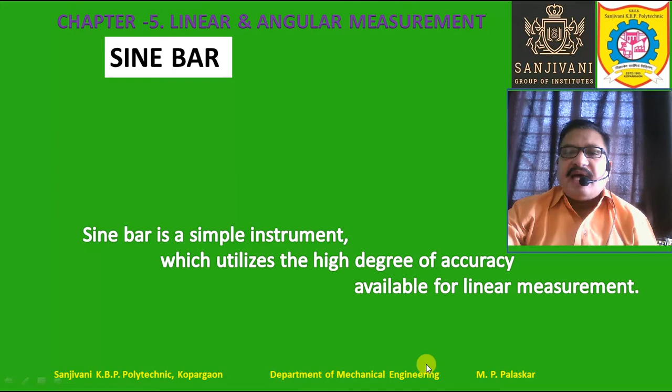The sine bar is a simple instrument which utilizes the high degree of accuracy available for linear measurement. It is used along with the slip gauges and the surface plate for accurate angle measurement, or it is also used for setting the accurate angles. For angle setting also, sine bar is used.

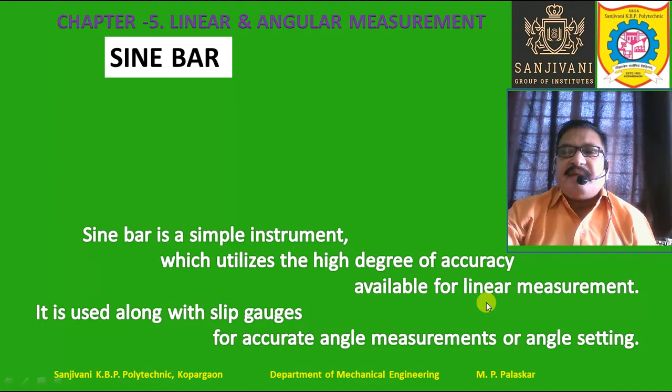The applications of sine bar include the measurement of taper plug gauge. So sine bar is used to measure the taper plug gauge.

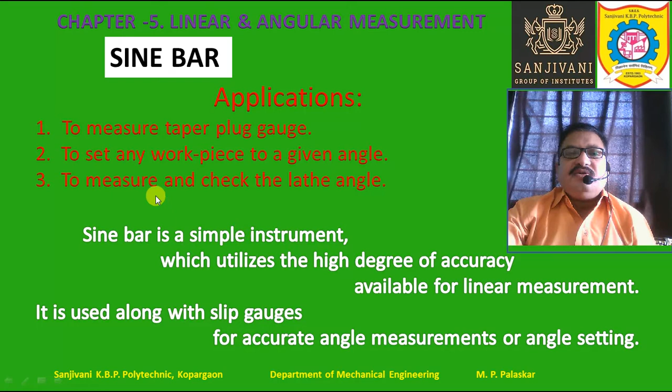Sine bar is also used to set any workpiece to a given angle. If a particular workpiece is required to be set to some given angle, then that is possible with the help of the sine bar. It is also used to measure and check the lathe angle.

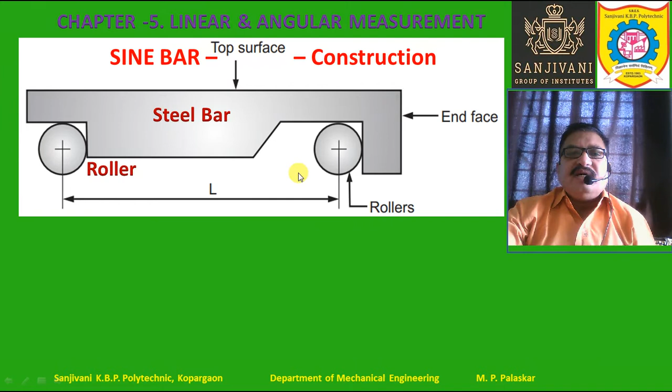Let us study the construction of the sine bar. The sine bar consists of a steel bar and two rollers. This is one roller, this is another roller.

These two rollers are attached to the bar at each end - this is the roller attached to the left end, this is the roller attached to the right end. At the same time, this roller is also touching this particular surface, the top portion of the sine bar or the steel bar is also in contact with the roller.

The distance between the two rollers, the nominal distance between the centers of the two rollers, is fixed and very accurate, and that may be 100 mm, 200 mm or 300 mm. So if you take a particular sine bar, either the distance between the rollers may be 100 mm, or it may be 200 mm, or 300 mm.

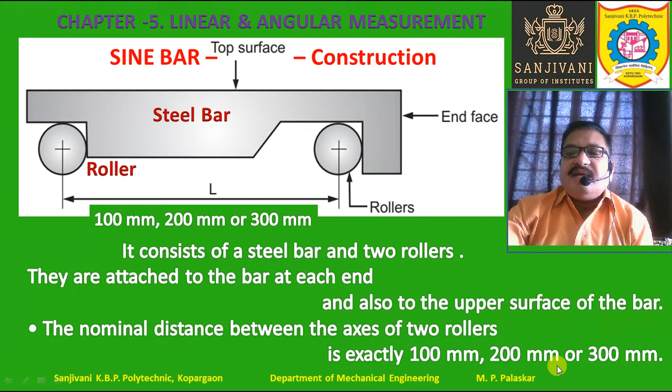The nominal distance between the axis of the rollers is exactly 100 mm, 200 mm or 300 mm, and the sine bars are specified according to this nominal distance between the two rollers as, say, 100 mm sine bar or 200 mm sine bar or 300 mm sine bar.

Now when the rollers are brought in contact with a surface plate, if these rollers of the sine bar are kept on the surface plate, the top surface of the bar is parallel to the surface plate. So this is the top surface, and it will be parallel to the surface plate.

So suppose this is a surface plate - this flat surface is nothing but a surface plate. And the rollers are kept on the surface plate, so automatically the lower end of the rollers will be in contact with the flat surface of the surface plate. In that case, the top surface of the sine bar will be perfectly parallel to this flat surface on which these rollers are kept.

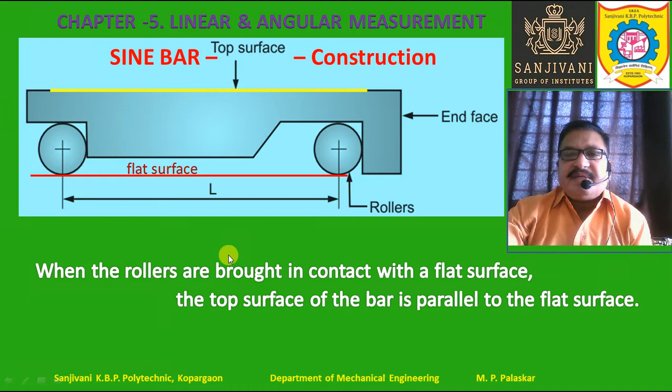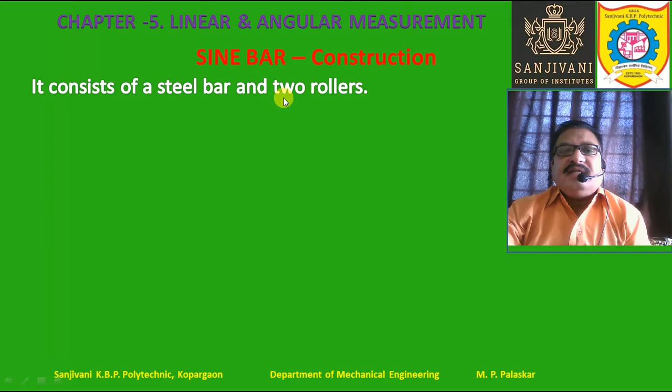Now the sine bar consists of a steel bar and two rollers. The bar is made up of high carbon, high chromium, corrosion resistant steel. The material of the sine bar is very important. The steel which is used as the material is high carbon steel and high chromium steel, and of course it is corrosion resistant because this surface of the sine bar faces relative motion, so wear and tear may be caused.

So in order to minimize the wear and tear, this bar is made up of such material which is corrosion resistant, and it is also suitably hardened, stabilized and precision ground. This material is very important - it is not only corrosion resistant, but it is suitably hardened, stabilized and precisely ground to the fine accuracy, flatness and perfect level.

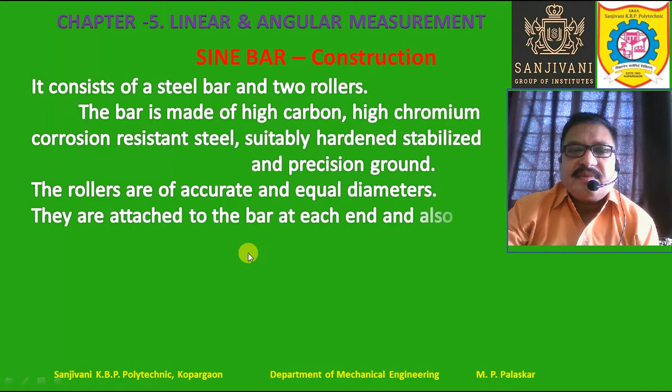The rollers are of accurate and equal diameters. The diameter of the roller is very important - it is very accurate, equal, and the location of the roller with respect to the sine bar is also very important and perfect. The distance between the centers of the rollers is also perfect and accurate, and the diameter must be equal. So these rollers are attached to the bar at each end and also to the upper surface of the bar.

The nominal distance between the axes of the two rollers is exactly 100 mm, 200 mm or 300 mm, and a sine bar is specified by this distance as 100 mm sine bar, 200 mm sine bar, or 300 mm sine bar.

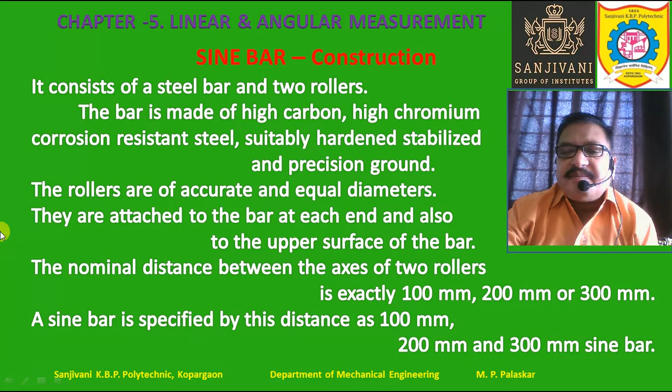When the rollers are brought in contact with the flat surface, the top surface of the bar is parallel to the flat surface. So the sine bar, when kept on the surface plate, since the top surface of the surface plate is flat, these rollers are in contact with the top surface of the surface plate. At that condition, the top surface of the bar is parallel to the flat surface of the surface plate on which the rollers or the sine bar are kept.

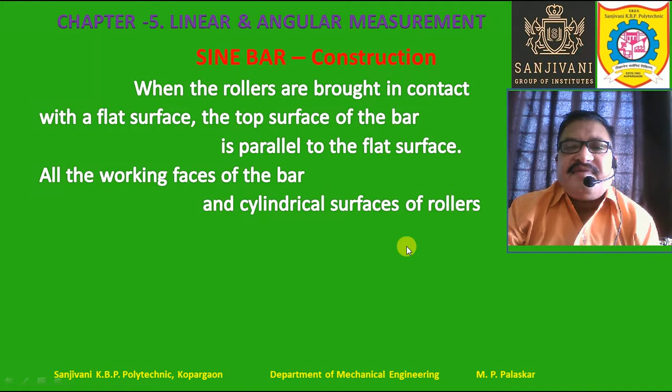All the working faces of the bar and cylindrical surfaces of the roller have a surface finish of 0.2 micrometer Ra value or better. So the roughness value is something like 0.2 micrometer, meaning the surface finish is very high.

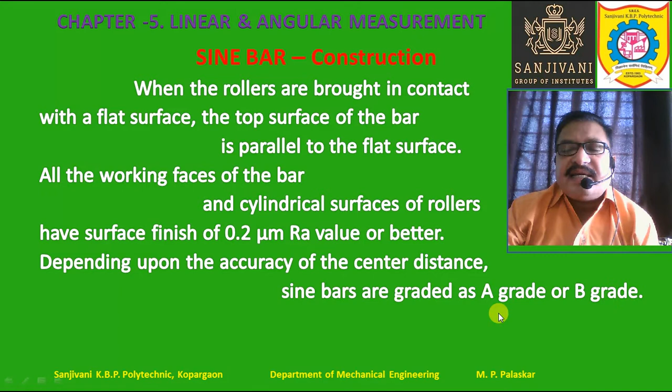Depending upon the accuracy of the center distance, sine bars are graded as A grade or B grade sine bar. Grade A sine bars are more accurate than the grade B sine bars.

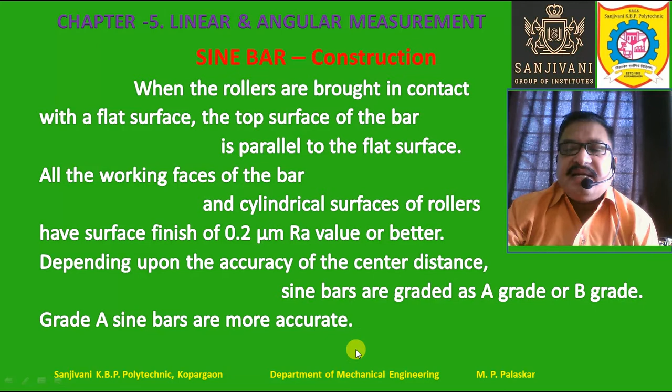Let us study the working principle of the sine bar. In order to set a given angle, one roller of the bar is placed on the surface plate. The surface of the surface plate is perfectly flat and accurately polished. So this one roller is placed on the surface plate.

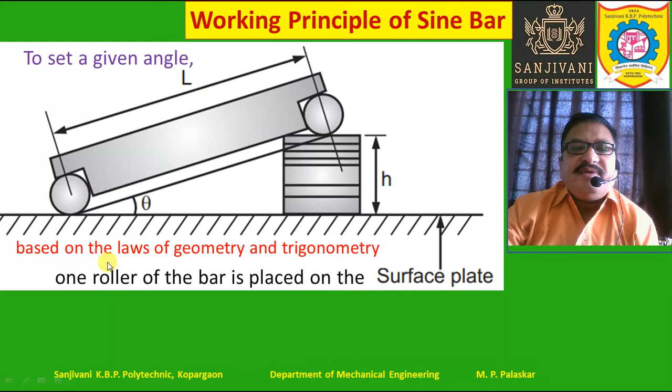The working principle of the sine bar is based on the laws of geometry and trigonometry. We are going to study how it is governed by these laws. So, in order to set the given angle, one roller of the bar is placed on the surface plate.

This roller is placed on the surface plate, and a combination of slip gauges is inserted under the second roller so as to obtain the required height h. This height h provides us the required angle theta, set by inserting the slip gauge combination below the second roller.

According to the law of geometry and trigonometry, we know that sine theta of a right angle triangle - consider this right angle triangle where the height is h and the hypotenuse length is l. Sine theta is equal to the opposite side of angle theta divided by the hypotenuse: h is the opposite side, and l is the length of the hypotenuse, so sine theta equals h by l, small h upon capital L.

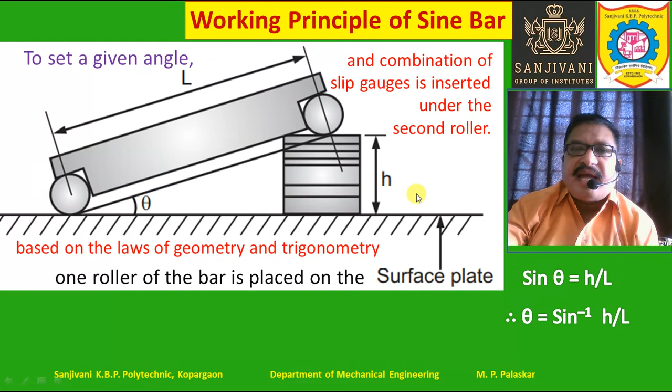Small h is the height of the slip gauges - the height of the right angle triangle - and L is the length of the hypotenuse of the right angle triangle. So h by L is nothing but sine theta, or theta equals sine inverse of h by L. Using this formula and this simple principle of trigonometry, we can find the angle theta using the sine bar - that is the simple working principle of the sine bar.

Now, how to use this sine bar? The sine bar is used for setting and measuring angles of work pieces or given components. The component may be larger or smaller than the sine bar, and there is a slight difference in the measurement method depending on size. Let us study how the angle is measured when the component is small, much smaller than the sine bar.

The sine bar is first kept on the surface plate - one roller will be on the surface plate, and we use a combination of slip gauges to obtain a certain height, kept below the second roller on the surface plate. The component is placed and clamped over the top surface of the sine bar, while the sine bar rests on the surface plate.

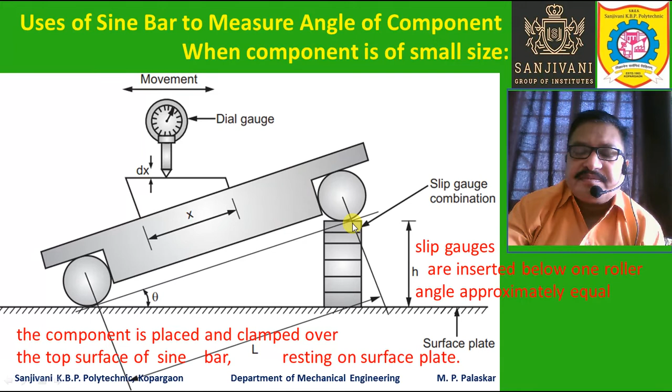Now next what we are doing is that before we bring the dial gauge, we will check that the upper surface of the component becomes parallel to the surface plate.

So if you set the sine bar and the slip gauges like this and keep the component on the upper surface of the sine bar, it will be observed that the upper surface of the component becomes parallel to the surface of the surface plate. These two surfaces become almost parallel. If these two surfaces are parallel, it means our setting is correct, otherwise we have to improve our setting.

And now we have to bring a dial gauge along with a stand, or you can also use the height gauge. So this dial gauge is fixed over a stand or a height gauge, and its zero is adjusted over some point on this upper surface of the job.

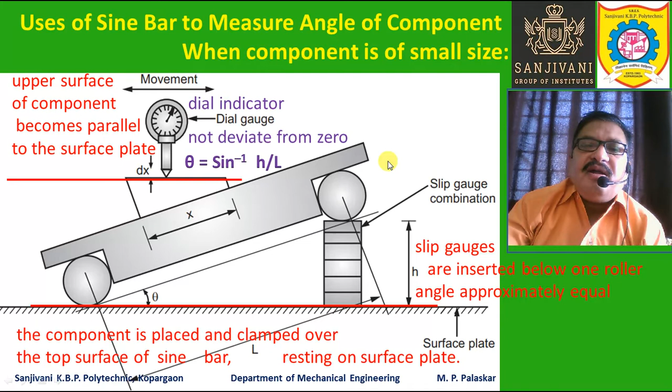But since it is difficult to adjust the combination of slip gauges, this height h, perfectly, there is a small deflection dx in this dial gauge. So we use this deflection dx to find the small correction in the angle, d theta, which will be equal to sine inverse dx upon x.

Dx is the small deflection of this dial gauge, or small change in height of this surface, and x is the horizontal length of the component whose angle is being measured. So sine inverse dx upon x will be equal to d theta, and now the correct angle will be equal to theta plus d theta, which is the angle of this component which is required to be measured.

And theta plus d theta can be written as sine inverse h by L plus sine inverse dx upon x. So these two equations can be added to get theta plus d theta is equal to sine inverse h by L plus sine inverse dx upon x. In this way, the angle of this particular component, smaller than the sine bar, a small size component angle, can be measured with the help of the sine bar.